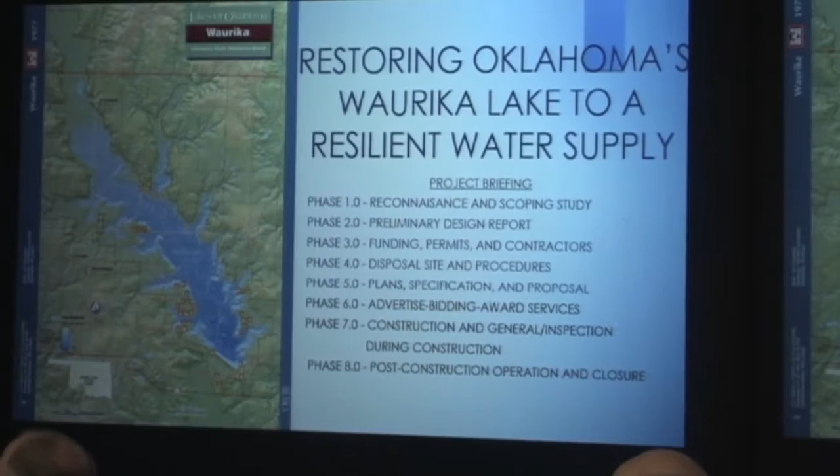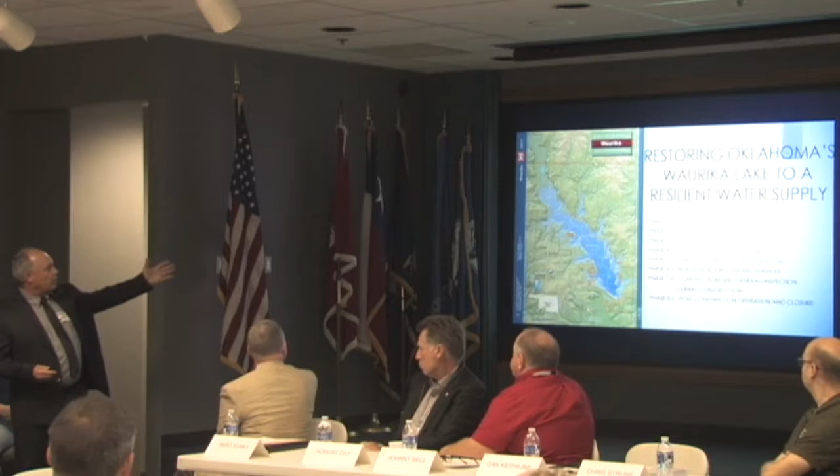This is kind of an exciting topic these days, especially when you see the new stuff here is virtually over. And so now everything we're going to be doing pretty much from this point on will be repurposing, rehabbing, replacing in kind, things of that nature. This project was very interesting from the point of they had a lot of issues. Here's our project briefing phases right there, all listed up there.

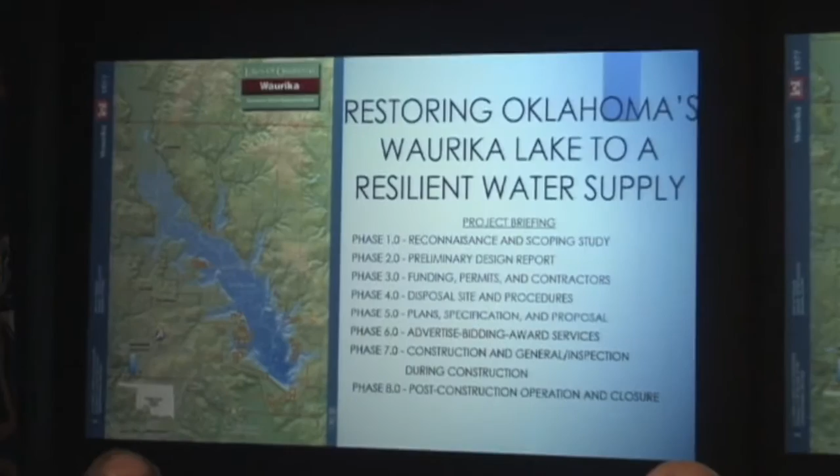And essentially, this is a lake that has about 10,000 square acres of surface area, and it's 187,000 acre-feet of storage capacity and its prime purpose is for water supply. And so essentially, it went through a drought period where it got down pretty low. And we'll get into the details of that and what they did and how we approached it. Essentially, phases 1 through 8 go from there.

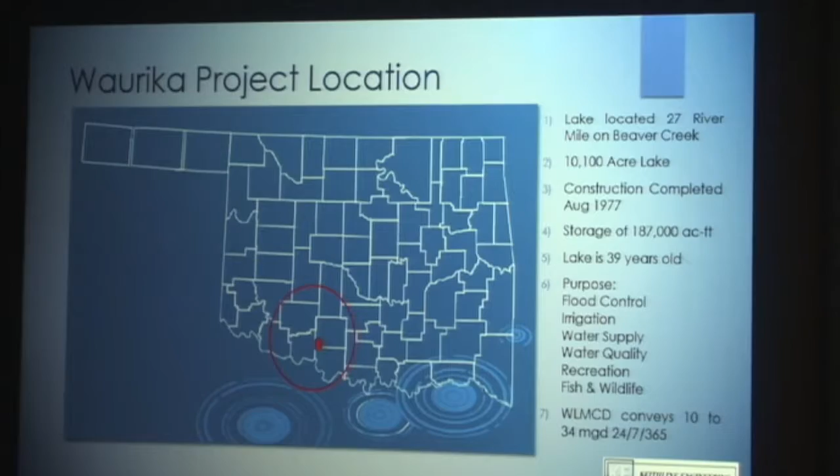The location of the project is in southwest Oklahoma. Half the lake is in Jefferson County, and the northern half is in Stephens County. Essentially, the lake is 27 miles upstream of Beaver Creek from Red River, so it's real close to Texas. As I mentioned before, it's about a 10,000 acre lake surface area. The construction was completed in 1977, so it's approximately 39 years old as of today.

Storage capacity 187,000 acre feet, and then the purposes down there are listed at number 6. Flood control, irrigation, the typical stuff that pretty much any lake of any kind of significance would be listed for. The WLMCD, which is the Waurika Lake Master Conservancy District, got its authorization from the state of Oklahoma in 1961, I believe. It conveys anywhere from 10 to 34 million gallons per day to its member cities. And I'll get into that right here.

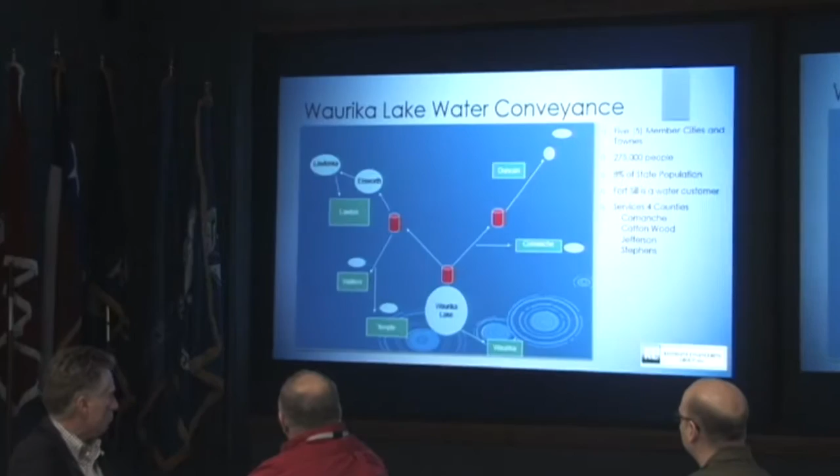Here's the member cities. The conveyance system goes as far north as Lawton, and then Walters, Temple, Waurika to the south, Comanche to the east, and then Duncan to the north. That's the 5 member cities. It serves 275,000 people for drinking water, which is approximately 8% of the state's population. It also serves Fort Sill as a major water customer, and it expands out over 4 counties.

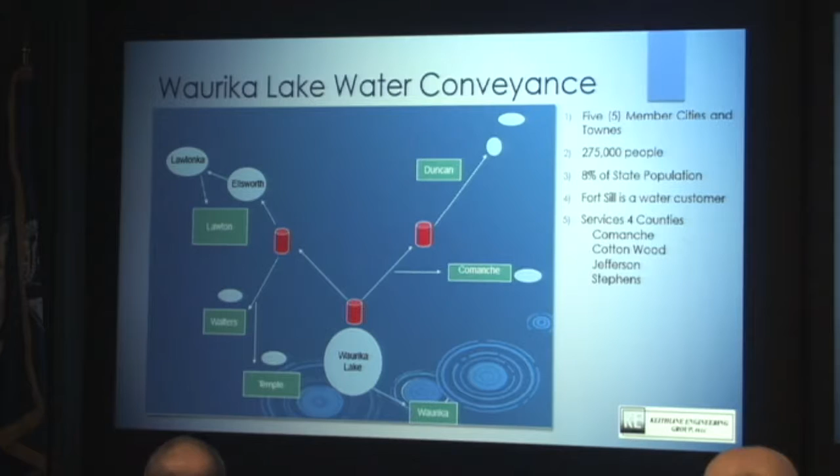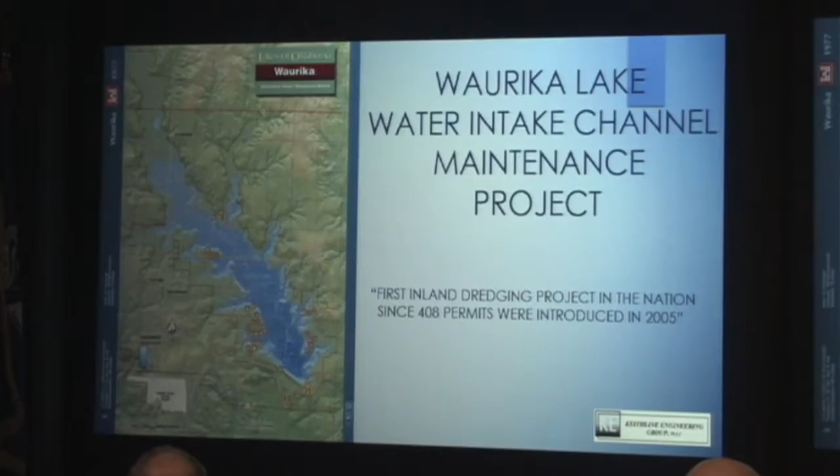The one thing in this situation here, it had an intake, and the bottom gates didn't work. Not only did it not work due to other issues, but also they couldn't access the lower bottom of the conservation pool. So essentially, one of the main objectives here was the dredging part. So that was real critical for this. And so this was one of the first dredging projects in the nation that received a 408 permit since it was introduced in 2005.

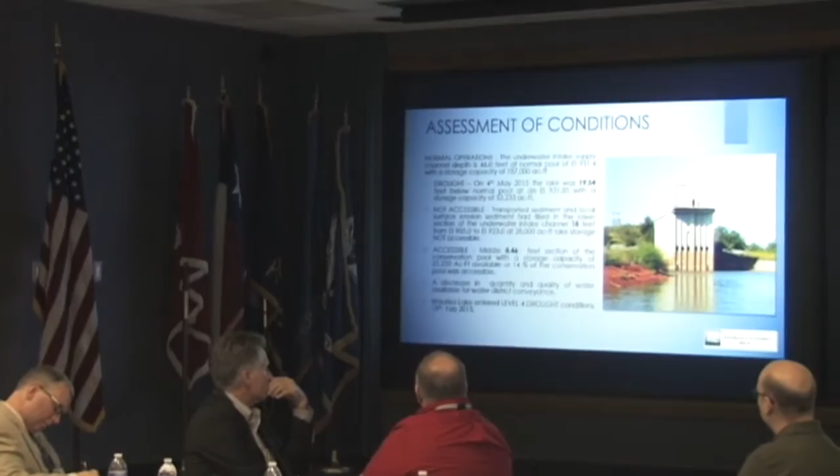Here's the assessment of the conditions that are out there. Under normal conditions, there's essentially 46 feet of normal water depth with a normal pool elevation of 951, which is 187,000 acre feet. When the drought came on, the drought took it down 19.5 feet, essentially reducing it to less than 30% of its storage capacity.

And then with the sediment deposit problem in the channel that feeds this structure, that's the intake structure, it really minimized the access to the lower conservation pool. So the only accessibility it had was the middle 8.46 feet, which is 25,000 acre feet. So it had a couple different problems. One problem was the evaporation and the lake losing water elevation due to drought. Secondly, it couldn't use its bottom gates to access the lower parts of the conservation pool.

The state of Nevada just got done with their big dam project where they had to get access to the bottom part of the conservation pool. So this is a normal problem throughout the United States. Most facilities that I know, the bottom gates don't work. It has sediment problems. And obviously, as your lake goes down, it develops water quality problems. And the lake got so bad that actually it was considered a level 4 drought, which is the severest of all.

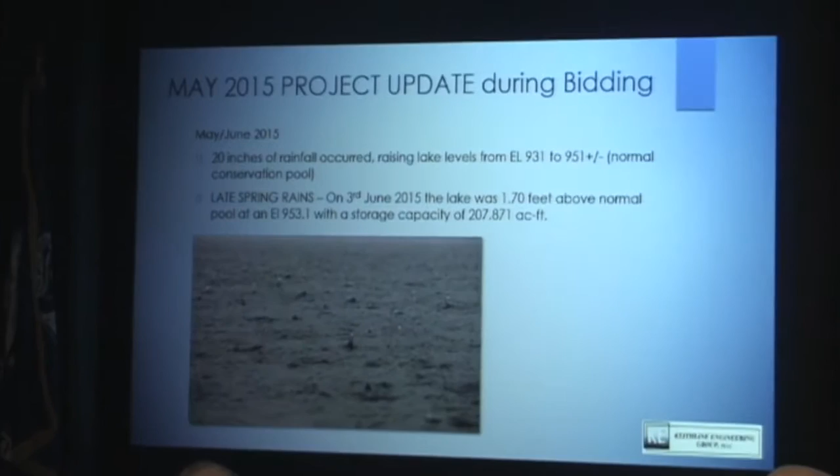Then we put together all the plans and specifications and applied for all the permits, got almost all the permits, and then we decided to bid the project, put the bid out, and guess what it started doing? It started to rain. About 20 inches of rain that brought it back up to almost over 207,000 acre-feet. So that was kind of unusual.

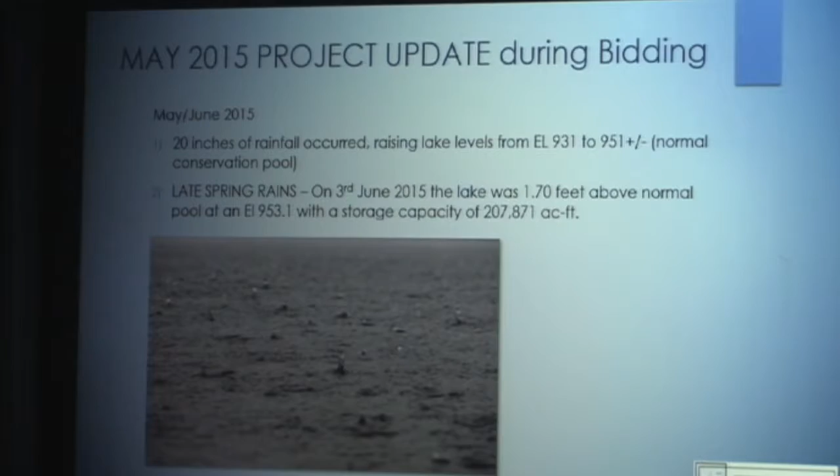So I guess one thing you can take from this is that if you want something to happen, you definitely put it out there to counteract it. In this case, we put it out to bid and it started to rain. Fortunately, the depth there still allowed us to proceed with the project, mostly because the client and his board understood that this was an issue that had to be dealt with.

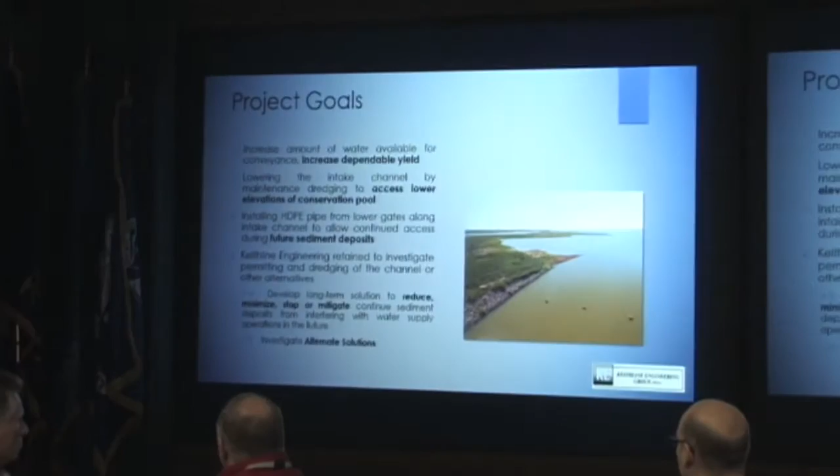A lot of times we kick the can down the road and people don't want to address the problems at hand. They still wanted to handle the issue here. And the issue was access to the lower conservation pool during drought. So the project goal was obviously to increase dependable yield, and also get access to the lower elevations of the conservation pool.

Also, if we did the dredging project, they didn't want to come back in 10, 15, 20 years and re-dredge it. Those bottom intake gates were constantly being silted in. Essentially it had 18 feet of sediment deposits against it. And so we believed that we wouldn't be back here 15 years later to re-dredge it. They didn't want to go through this thing again.

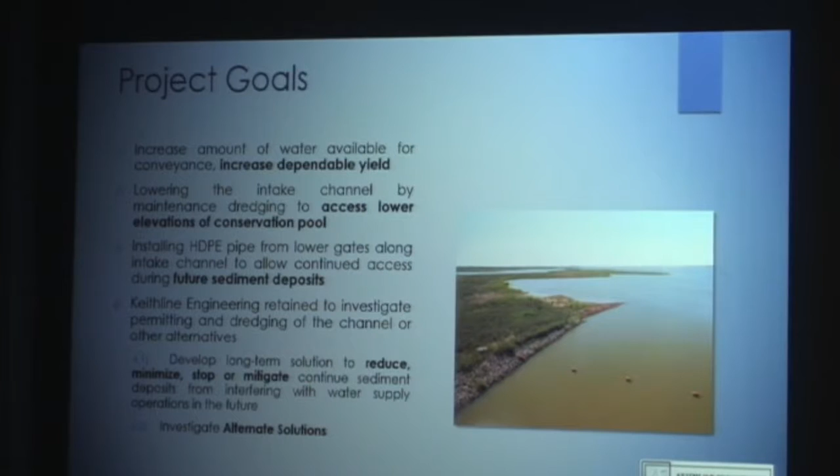So we decided to study the issue and find out what options we had on our plate. One of the options rose to the top, mostly due to money, because it was the cheapest option, which makes it pretty easy. We looked at different alternates, and this intake right here, you can see a channel. It's underneath the water and was silted in.

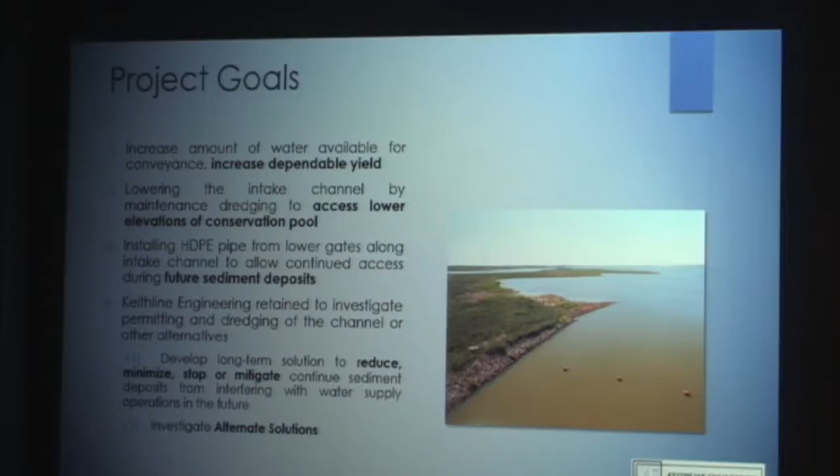So if we would dredge that sediment out, remove it, and then put a pipe down the center and have a floating intake at the end, in the future, when the sediment would redeposit, it wouldn't be an issue because we'd have a pipeline and a conveyance line. That conveyance line can do up to 30 million gallons a day. That meets the mission of the original intake facility and pump station. So here we are, off and running. We got all our ducks in a row as far as meeting the goals of the original deal.

We also looked at some of the alternates. We looked at boring underneath the lake. We looked at certain types of barriers to minimize sediment deposit into the channel. And this one rose to be the best one.

There were a lot of players involved here: the WLMCD, Dave Taylor as board manager, the board, all the sister cities, the Corps of Engineers, the Bureau of Rec, just a lot of people. One of the things that was really good, we had bi-weekly meetings that really pushed the project. We didn't have them just to have them; we had them in critical phases of the project to make sure it kept pushing along.

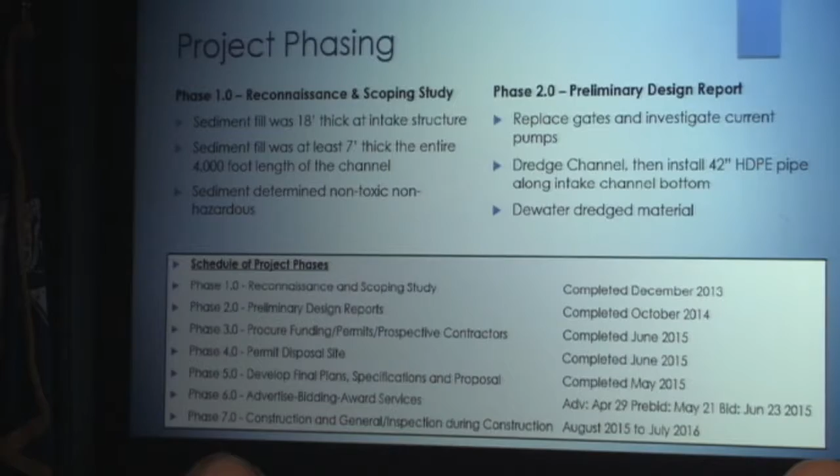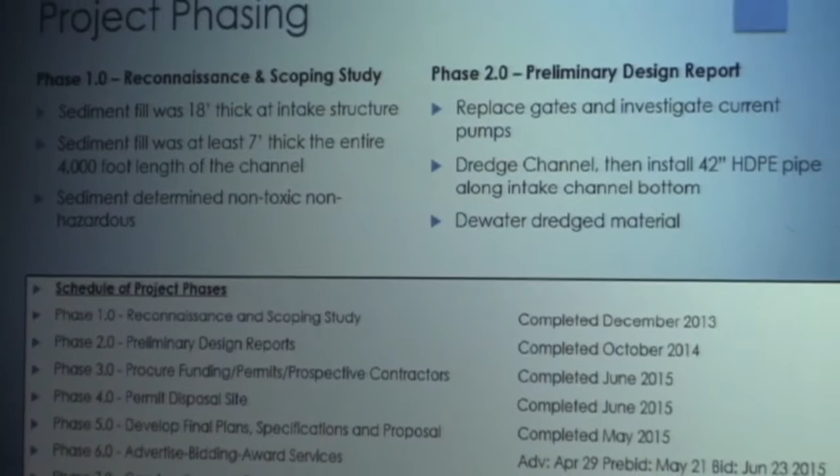Here's some of the phasing that was advertised. I won't read it all, but some of the completion dates are down at the bottom. Like I said, we bid the project in April of 2015, and it started to rain in June of 2015. Fortunately, it rained right before the mandatory pre-bid. So the contractors came out, looked at the job, saw the lake full, and said we can still do it. So we decided to proceed with the project, and it had very little cost impact.

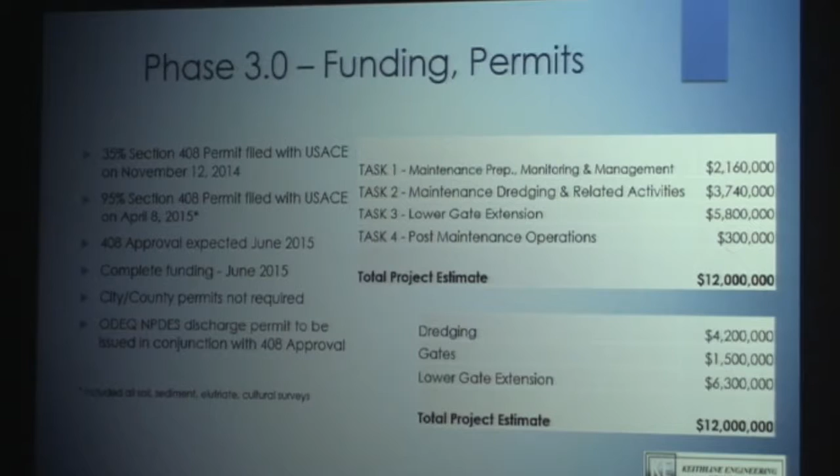Phase 3 was the permitting part, how the project is broken up into different tasks. One of them is the maintenance, monitoring and management, going along with task 2, which is the dredging part. Task 3 was the lower gate extension, where we installed new gates, but we also extended the gates out to the center of the lake with a 30 MGD floating intake.

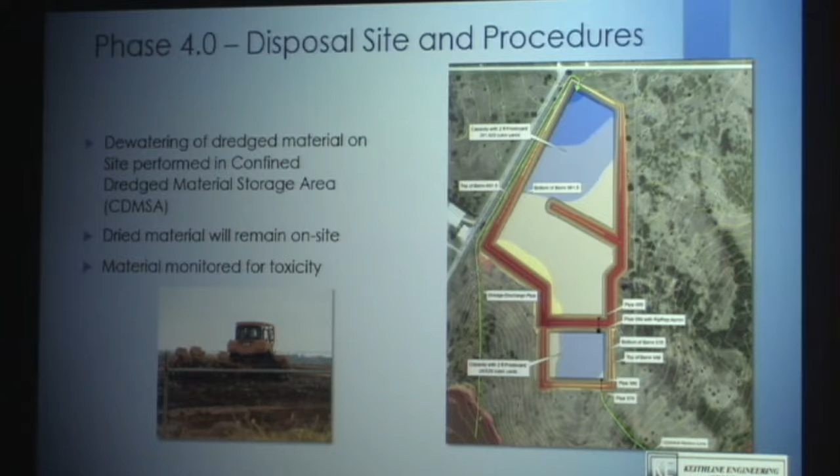Proceeding on, Phase 4, we did the design of the CDMSAs, the confined dredge material storage area. This is utilized to hold the dredge slurry to allow it to decant and clean up before we release it back to the lake. Here's the original green line. To the left is the supply line, and the green line to the right is the outlet back to the lake.

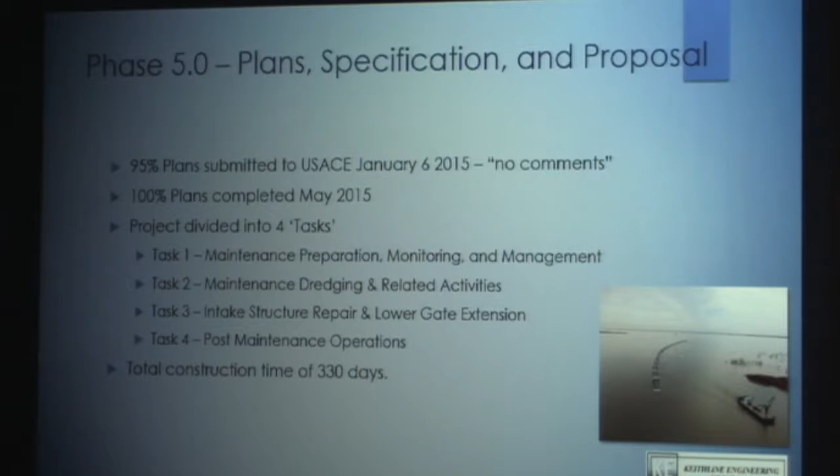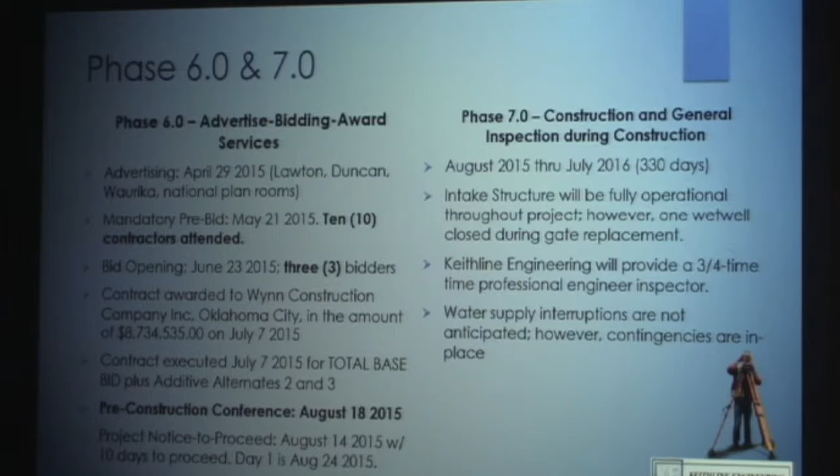Of course, we're going into Phase 5 with all the plans and pulling them all together. Everything is designed and approved at this point, including the environmental, with the exception of some particular stuff. We actually did have all our permits in place when we bid the project, but we utilized a real creative proposal that would allow us to adjust to anything that the permitting people would throw at us. So we bid the project as a base bid with alternates that could adjust to any situation that they would throw at us. And so with that, it real easily allowed the project to proceed 2 months ahead of time.

Proceeding on here, on the permitting part, these are all our lists of our permits, including the 33 USC Section 408, which was kind of unique for an inland project. We also got our FONSI, nationwide permits 12 and 16. Real estate right-of-entry and easement documents to accommodate not only the project activity, but also the future activity for maintenance. That's one of the big things we try to definitely plan out, not only the maintenance, but also in the future when they replace it.

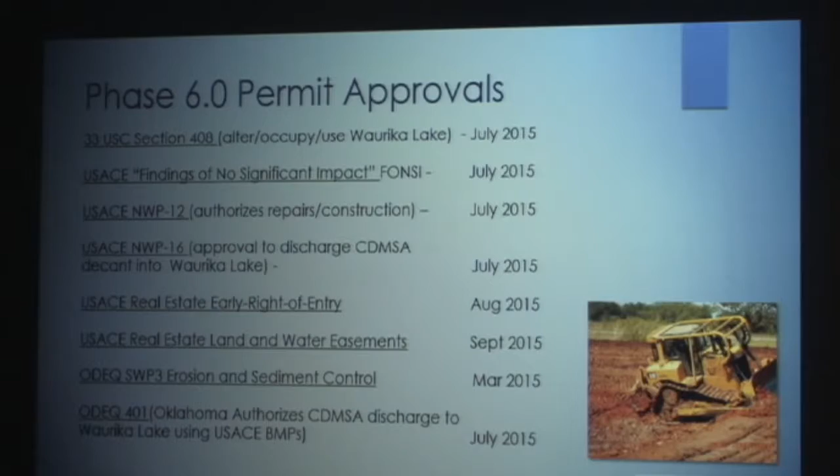So we talk about that life cycle cost analysis. It should also include maintenance as well as replacement in the future to have the true dollars of what a repair would cost. Of course, ODEQ down at the bottom there, we did get a discharge permit from there. But one of the things there, we did best management practices on the stormwater applicant.

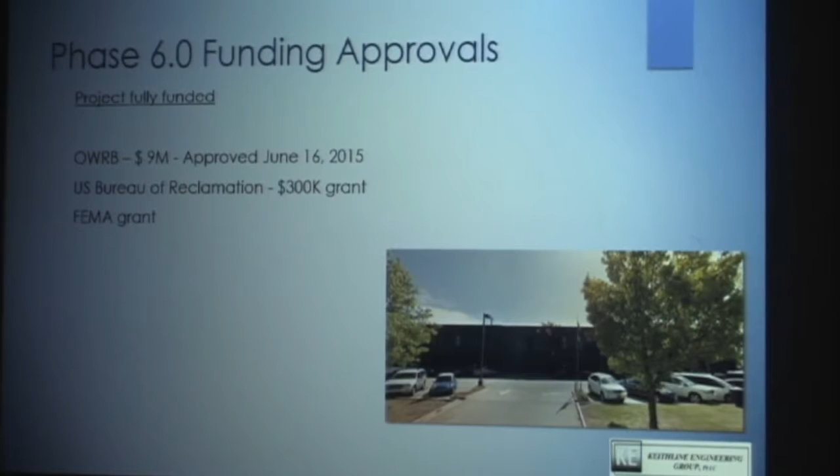On the phasing and funding part, Phase 6, this was huge. OWRB loans, as well as the Bureau of Rec came in with a grant. FEMA was going to supply some funding for the project, but because it rained, it was no longer a drought project, and we lost that money. We think it could have been $3 or $4 million.

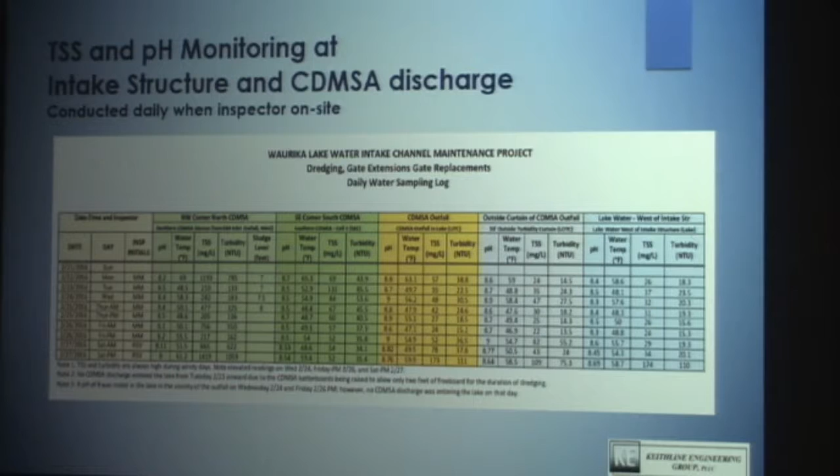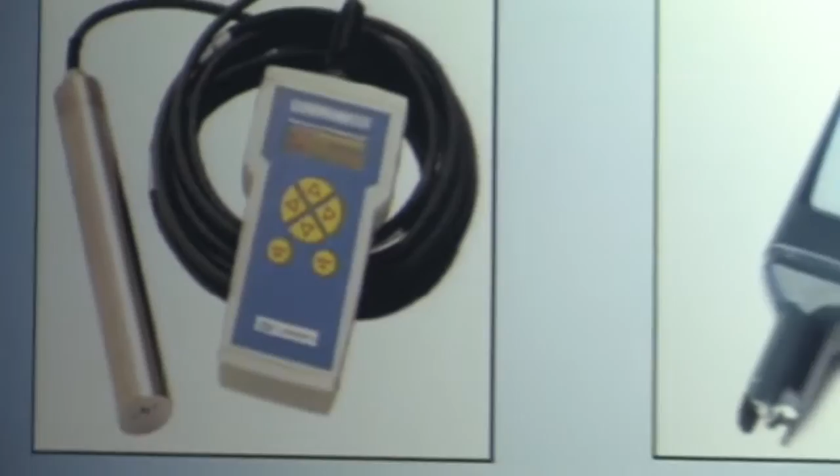Here's some of the tables that we monitored, the CDMSAs on its discharge concerning the intake water on the environmental part. Here we listed everything from the TSS to pH as well as water temperatures and NTUs. Here's some of the instruments we used in the field to monitor that and to take those measurements.

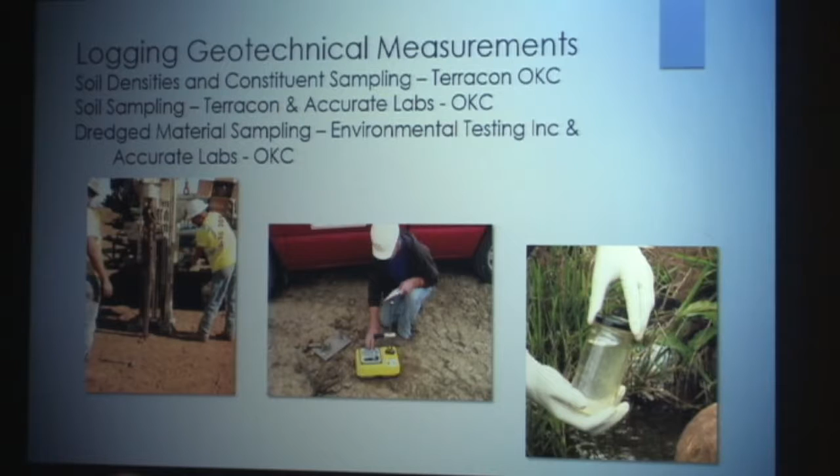Here's some of the geotechnical measurements that we did at the bottom of the CDMSAs in order to document what the existing background conditions were. In other words, the existing background soils could have obvious background stuff that would not be desirable to have. So we needed to know that baseline. That way, when we put the sediment in there, it would show up as being an additive.

One of the big things we encouraged and also had requirements in our specifications about was safety, including any kind of oil spills, which is a real possibility when you're dealing with construction equipment right on the edge of the lake, which we all know.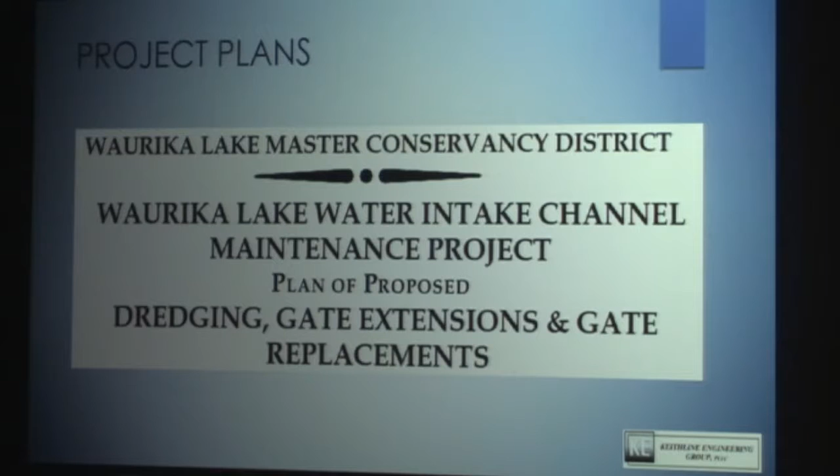The name of the project here, we called it the Dredge Gate Extension and Gate Replacements. So that was kind of an interesting title, I thought, that we came up with. We talked about this for, I think, 4 hours in the group right here. This is Bob, Joe, and Jim.

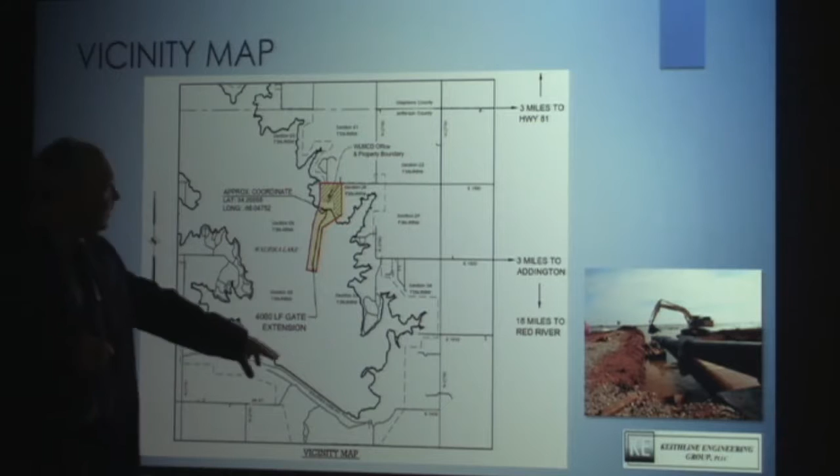The facility here, like we talked before, is more in the center of the lake. That's one of the problems of this situation, and it is a little different than normal. The intake is located not at the bottom of the lowest part of the lake. The actual outlet for the lake is down here. And so, due to the wisdom back a long time ago, they decided to move the intake right here, which is about halfway down the gradient line of the original creek that went through here, Beaver Creek.

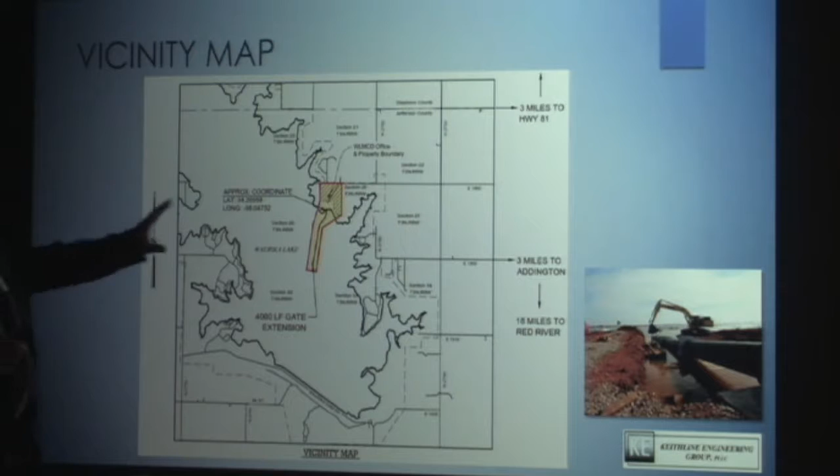So with the combination of that location, in the summertime when they're pumping heavy, pumping 30 to 35 million gallons out of this, any sediment that gets in here is attracted to this channel. Here's the channel that's underneath the water. So essentially you have all the sediment that's in the lake going up here. So in this channel, the sediment deposited was thicker than normal, because the rest of the lake is doing pretty well. But this channel had up to 18 foot of sediment against the intake.

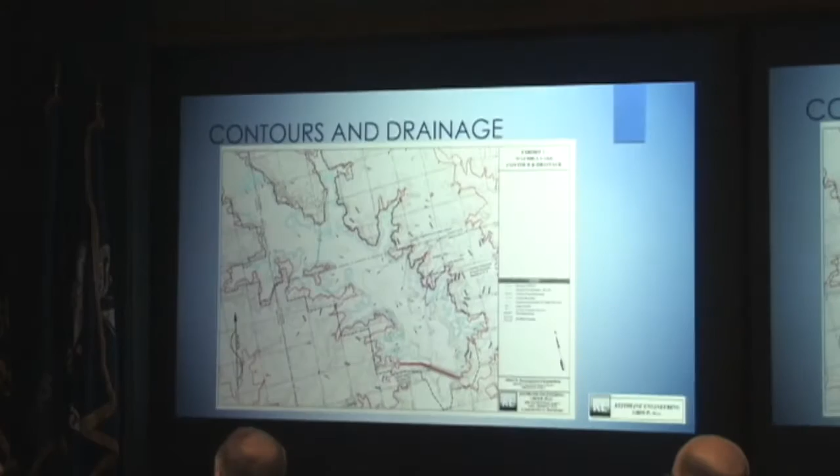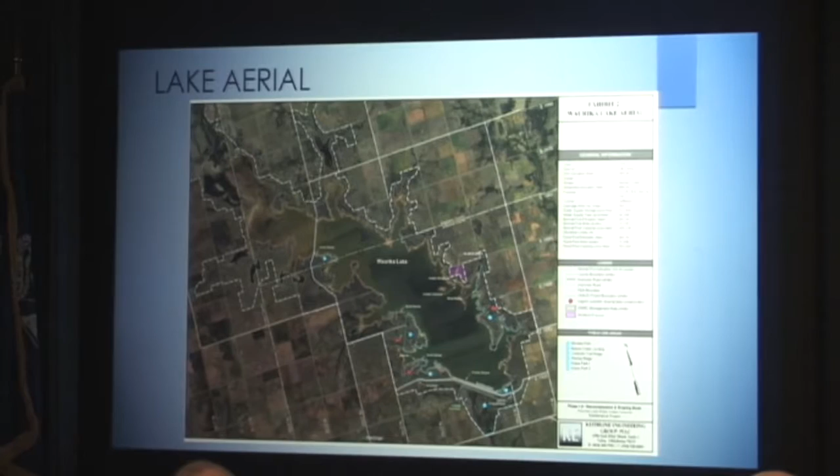Here's some of the contours and some of the exhibits that we use to demonstrate the locations in the contouring. Other exhibits here showing some of our activity. Here's one of the easements.

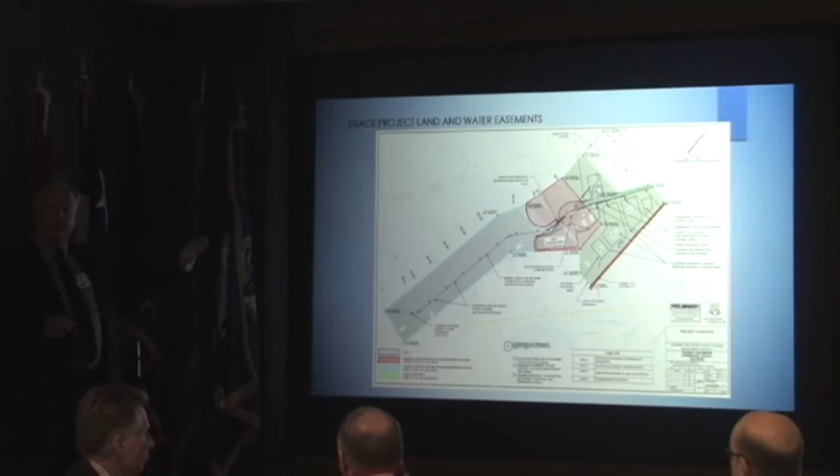Well, this was kind of interesting. Here we not only got easements for the construction activity, but also for future maintenance. So we didn't kick the can down the road. We addressed it, and so that way, someday when they have to do maintenance on this or replace it, they'll have the easements in place to do this work, and they won't have to go back and do anything else.

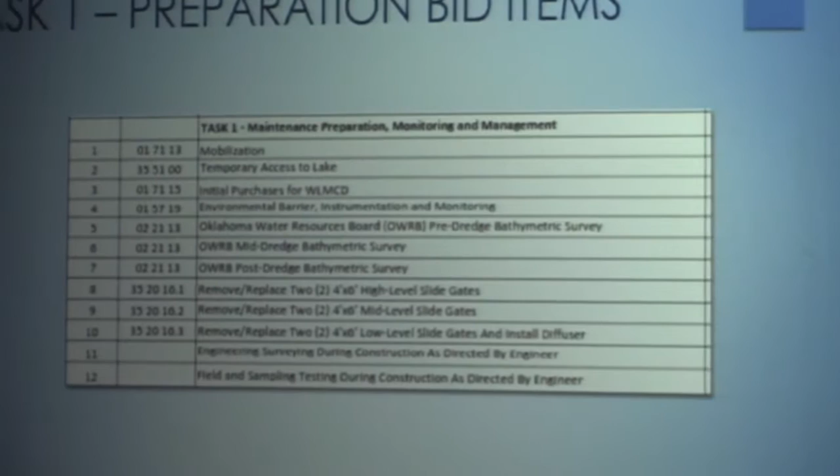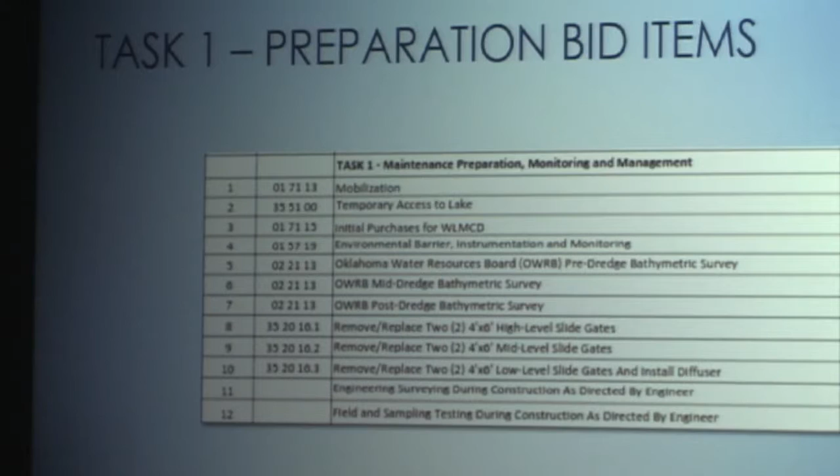Here's some of the bid items. I think it broke down to be about 45 bid items. Again, there were 4 tasks, major groups of activity, and here's a listing of some of them. I won't read them all to you, but anyway, that was remove and replace. We removed and replaced six 4x6 slide gates.

I know I'm out of time, but real good.

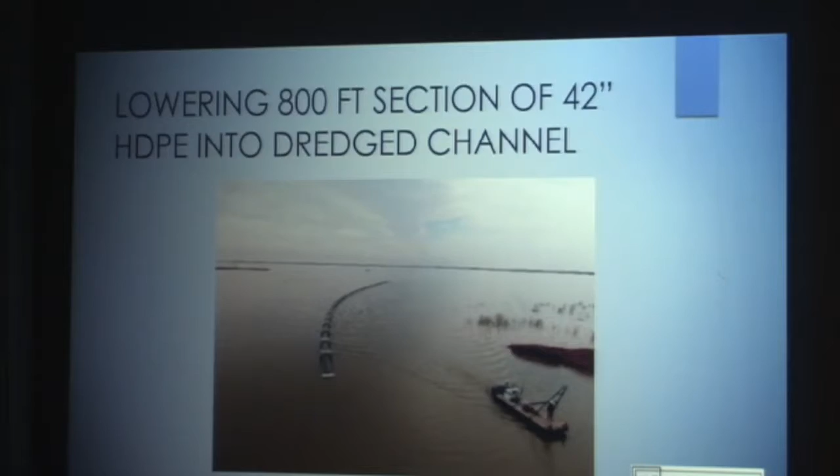Yeah. We also monitored it with some Lowrance equipment and the boat there. Here we're sinking in some of the 800-foot-long, 42-inch HDPE pipe. You can see the concrete anchors around it. They were 25 foot on center. Again, here's another photograph showing some activity of sinking the pipe.

Here's some tricks that we did to monitor the contractor's positioning, and so we had an understanding. This is the 2 lower intake gates that the pipe came in, and it came up to 2 and then went into each chamber. The intake has 2 chambers, an east chamber and a west chamber. So essentially they could do maintenance on one side while the other side is operational.

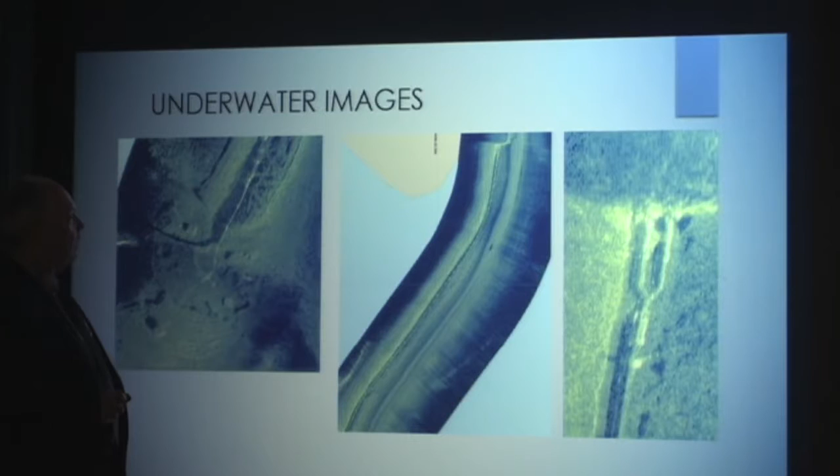Here the pipe's coming out. This is about 1,000 foot long right there. And you can see the little blow-up of that right there. This was kind of neat, and this helped the WLMCD board understand what was going on, because a lot of people didn't really understand. Things like this really showed people what we were doing, how we were doing it, how we were monitoring the construction quality, real critical.

It's my experience with construction, as long as a contractor knows you can check them, they usually do a better job. So you make sure that they know that you can check them. Even with this type of stuff, we made sure the contractor knew that we could check them, and he did a reasonably good job with the exception of a few minor things. Of course, they're contractors.

So this is the intake right here. This is the original Beaver Creek. So we have a floating intake there right on top of it. And then here's a cable and an anchor to it. So that kind of shows you some of the action.

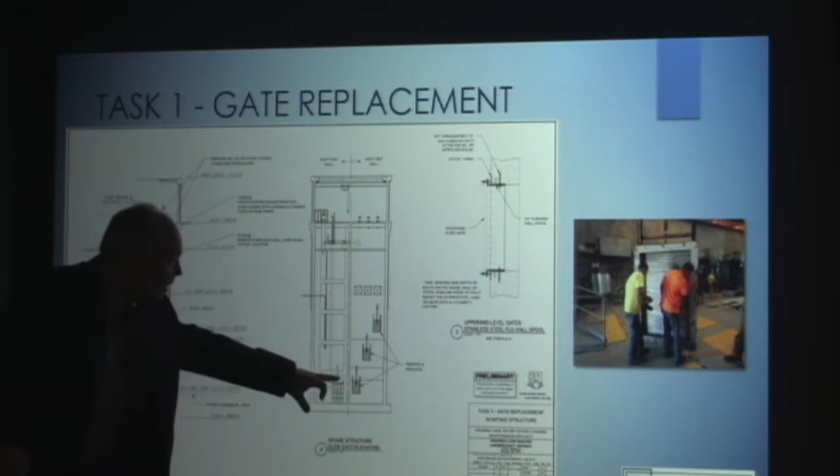Here's the intake. This intake is awesome. It's 114 feet from the bottom of the footing to the top. It is just huge. You see it's broken up into 2 chambers, east and west. And here's your lower, middle, and high intake gates. Each gate is 4x6. The intake facility is just awesome, and they did a real good job of planning out a lot of replacement in that facility. I was really excited about that.

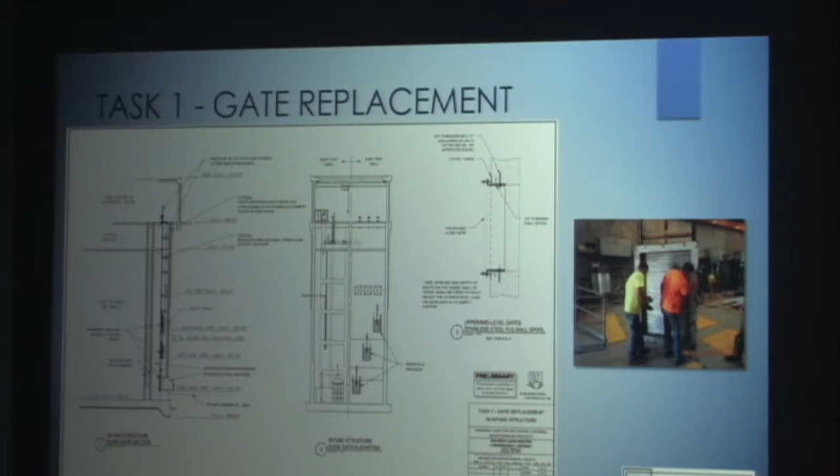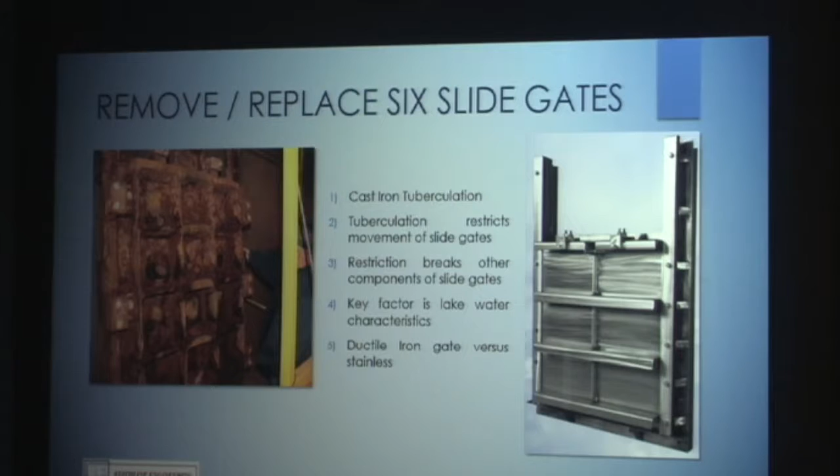Here's the gates that we replaced. They had major tuberculation, and it really restricted their movement. We decided to put stainless steel gates in, and that seems to be working pretty well, with the exception of some leaks that we're in the middle of correcting. But that was a big deal, ductile iron versus stainless.

Here's some of the issues; they're still trying to get these gates repaired. It's still shooting out some, it has a few little leaks that don't meet the specification. But they're going to repair this, I think, next week. There's some more shots, some concrete repairs we did inside. That's a shot from down below at the high intake gate right there.

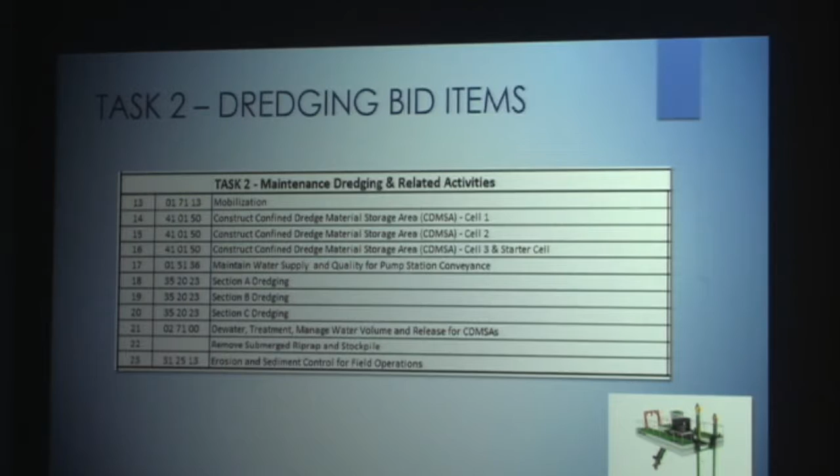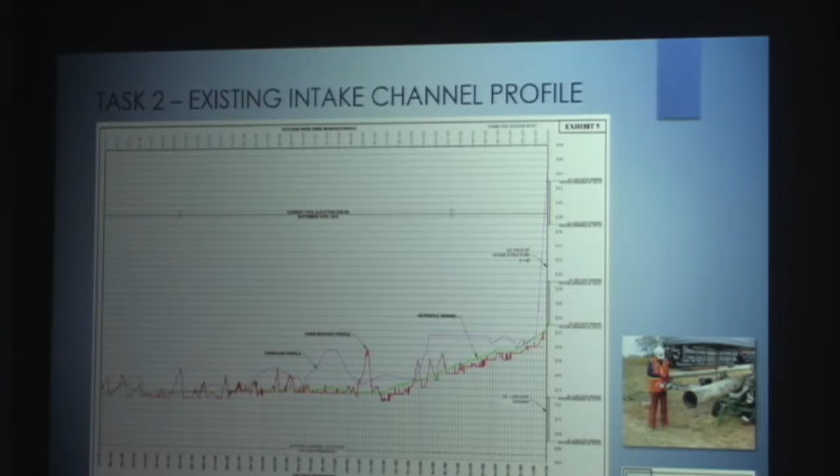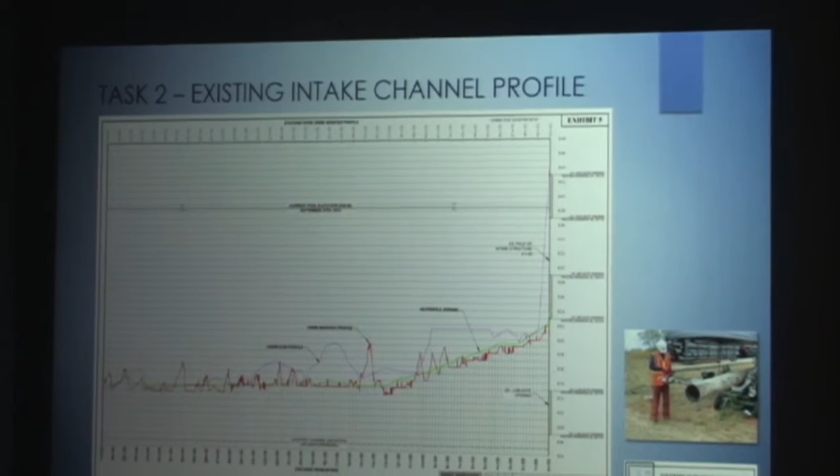Here's task 2, which was more of the CDMSA facilities in the building and construction part. Here's the original profile that shows the sediment. Here's your intake over here to your right. You have your lower gates, mid gate, and high gates. And you can see here's the 18 foot of silt. The original channel is down here. So you can see that 4,000-foot channel had attracted quite the sediment deposits.

Here's another shot. Here we put a plan and profile together, and we actually depicted these areas separately. We thought the dredging contractor might bid these separately, and the pricing was real close. But again, there we wanted to give the contractor options too. We always want to make the contract specifications as fair as possible, so that way the contractor feels comfortable, and that way he gives you his best price.

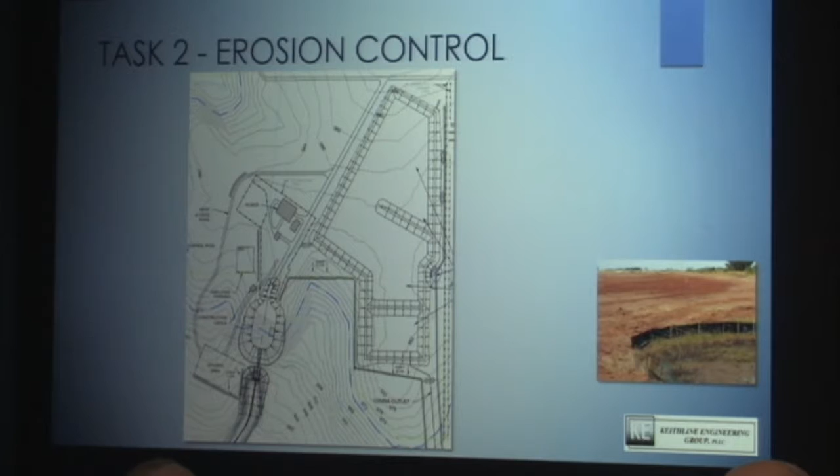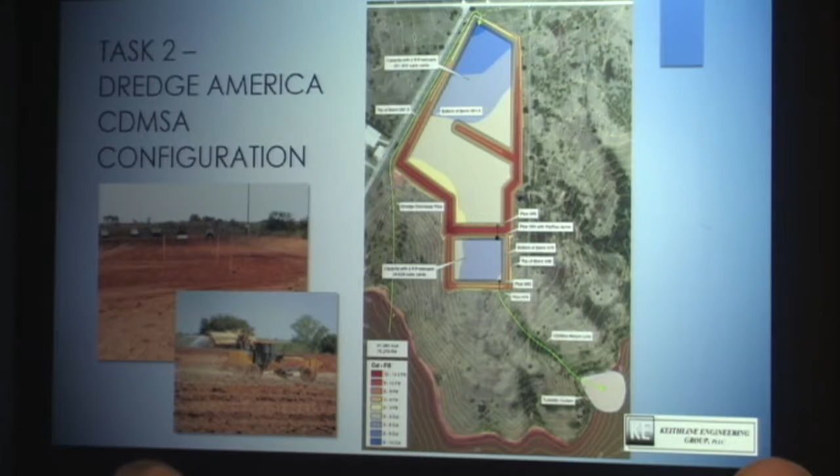Here's another part of the facility for erosion control, showing the CDMSAs, and then here's your intake over here, and then here's your CDMSAs to the right. Fortunately, we had a lot of land, so we could spread out a little bit. The CDMSAs are 18 acres in surface. Here's some erosion control stuff. There's some more exhibits showing the CDMSAs as they're being built. Again, there it's 16 acres to the top, and then the one on the bottom there is about 2 acres.

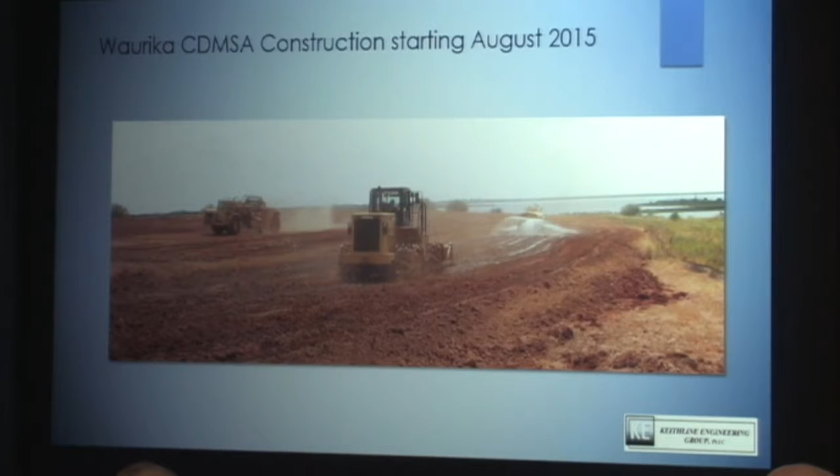This is showing what the slurry looked like when it was coming out of the end of the hose. And we made sure the contractor spread it out or kept relocating the nozzle so that way it evenly distributed in the CDMSA. So we were real pleased about that. Here's another shot where we're constructing these CDMSAs, which is confined dredge material storage areas. And that started last August.

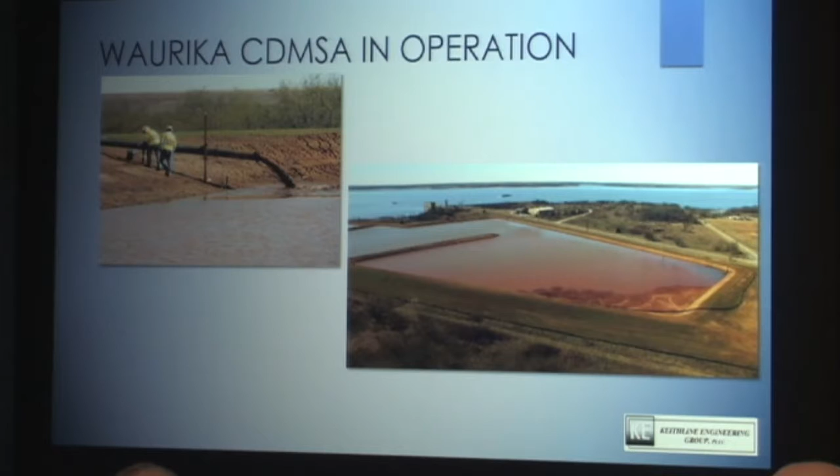Here's some better shots, some aerial views, some drone video we even have. That was one thing that was a real success, was the drone videos. Again, they showed them to the board when they approved the pay request of the contractor for like $1.7 million. If they see this drone video, they kind of get a gist of what they're paying for. It really helps understand. Dredge America was the successful bidder. And that's a cutter head technology with suction that was required by the contract specifications.

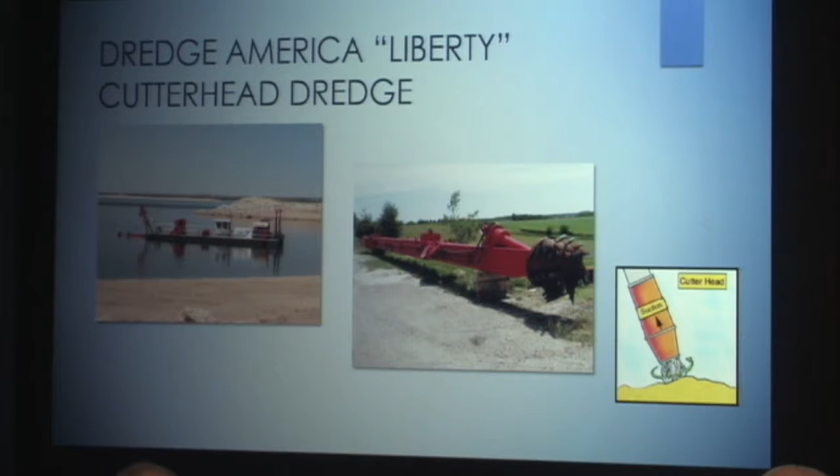Here's your intake boxes that are decanting the clean water off the top. There's your turbidity curtains and your outlet discharge, two 12-inch pipes discharge. And I think they could have just done with one 12-inch, but they decided to put two there. Here's an aerial shot or drone that was out there that circled the activity. And here's the dredge equipment.

Here's the intake. Here's the storage pipe, which will be the 4,000 feet of pipe that'll go along the underwater channel. And then here's the dredge slurry going through that pipe up to the CDMSAs, which is over to the east and north of the lake.

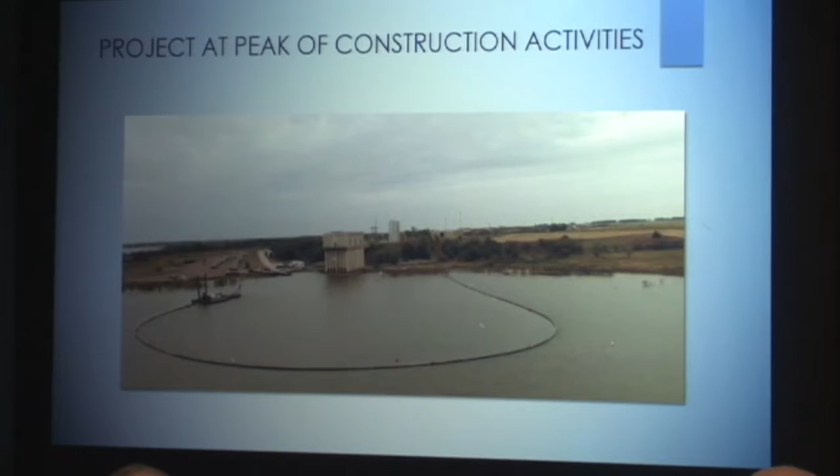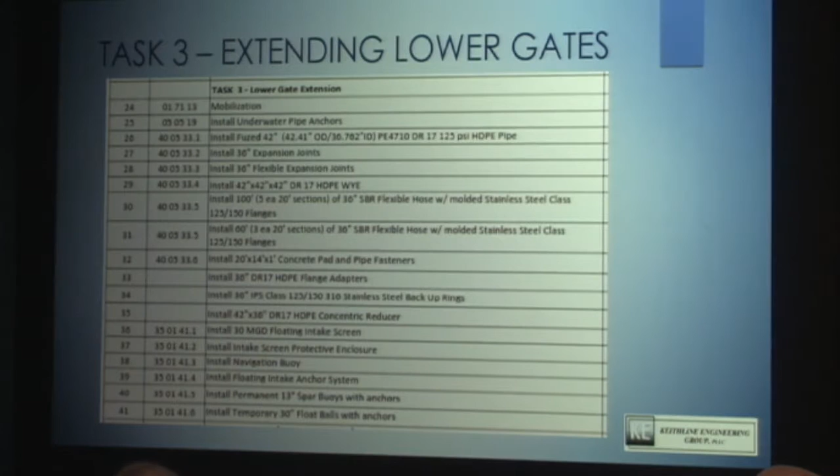I hate to interrupt. But yeah, we'll put it on the side. We are already over time. So if we can watch the drone video. Do you want to do that? Well, it just depends. How long is that? I just want to honor everyone's time. Let me just kind of go through. I think if we show a drone video, I want to show the one that's better. Sure. We want to do one.

Okay. Here's some more activities. How we put the pipe in the water. Divers. We had a great diver. Knew the laws of buoyancy. We also monitored the quality of the HDPE pipe, and we had to redo 20 joints. Again, there we told the contractor we could check them. We told them how we were going to check them, and then when we did check them, there were 20 joints that didn't make it, so they had to redo it.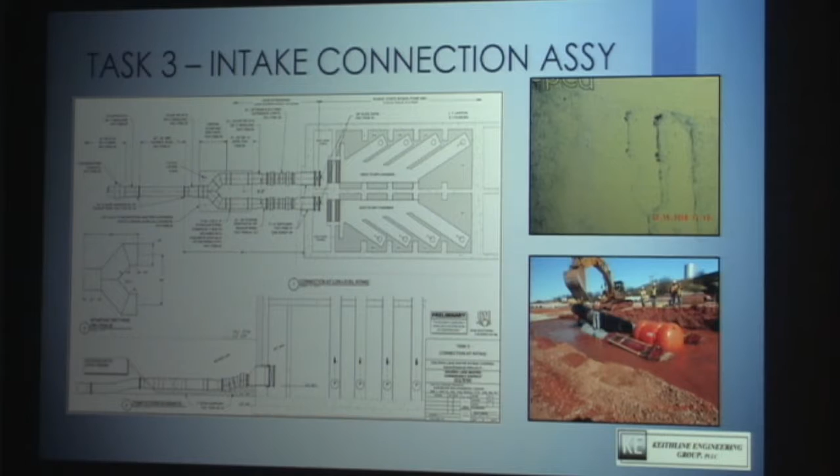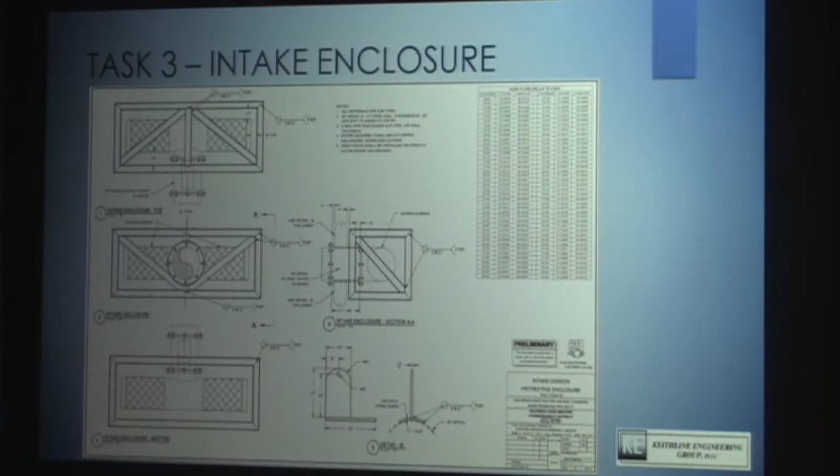So here's some more layouts. Floating intake, 30 MGD, photographs, buoy, cage with a 30 MGD. There it is right there. Anchors, expansion anchors as well as concrete anchors for weight.

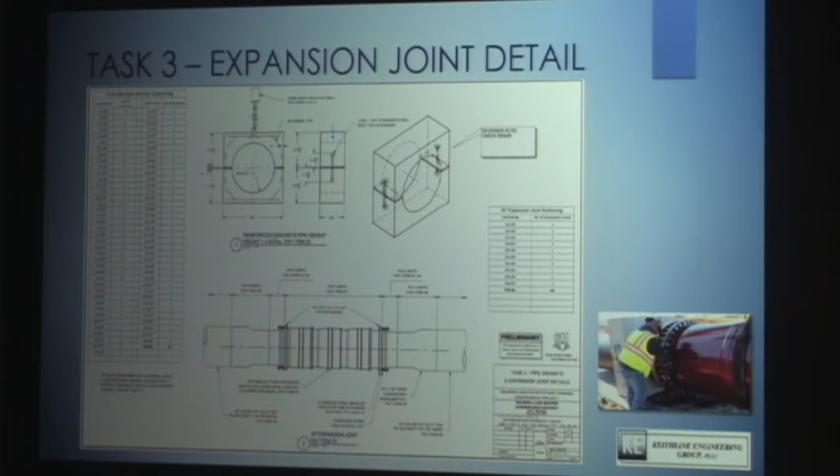Last activity, project cleanup. The CDMSAs are now going through a three-period activity, and right now it's in period 2, where we're essentially isolating and decanting the free water, and we're almost done with that process. The dry out has started, and also our sediment is settling. And then from there we'll reclaim the land back to its original condition.

I think this is the one we want to do. Can you hit that?